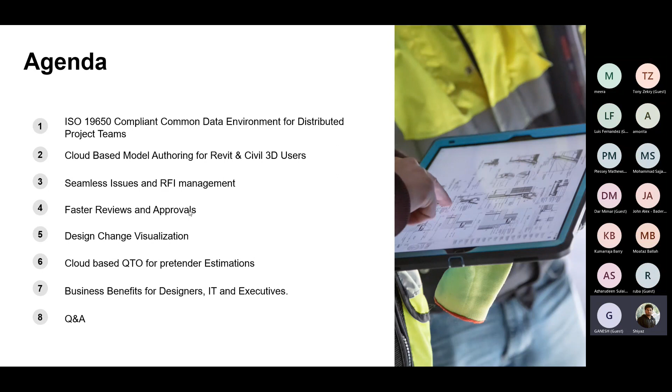I request, yeah, that's fine. Yeah. So let me start with the first session, ISO 19650 and the common data environment. So before starting, I would like to know, what's the ISO 19650? So basically, many of you are working with this specific code based on your requirement many of the time. Your consultant will be working with this. Your client will be working with this specific code. So you have to work with this as well.

So basically, ISO 19650 is a new international BIM standards family that defines the collaborative process for managing information over the whole life cycle of a built asset using BIM. So the ISO 19650 series enables teams to minimize wasteful activities and increase predictability around cost and time. So this standard can help all the AEC project teams to build a cohesive way to share, publish and review design and construction documentation to ensure that all the parties have access to the right information at the right time.

So another important aspect I would like to cover related to today's context is that the ISO 19650 standard provides guidance for storing and managing project data.

So this includes the use of information containers and a common data environment to support the 19650 processes. So what's a common data environment? This is one good definition for a common data environment. A common data environment is the single source of information used to collect, manage, and disseminate the documentation, the graphical model, and the non-graphical data for the whole project team.

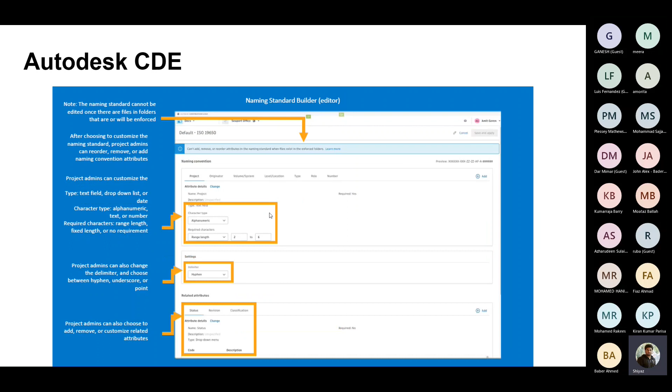So you have the freedom to set up ISO 19650 compliant naming conventions or metadata and the workflows inside the Autodesk CDE. So there are provisions available here. And apart from that, you can enforce your common data environment folders with this specific rule. So if any incoming file violates the preferred naming convention, it will not fall into the right folder structure. Instead, it will fall into a temporary holding area until it's compliant with the naming standard. And once it is compliant, then it can be moved to the right destination.

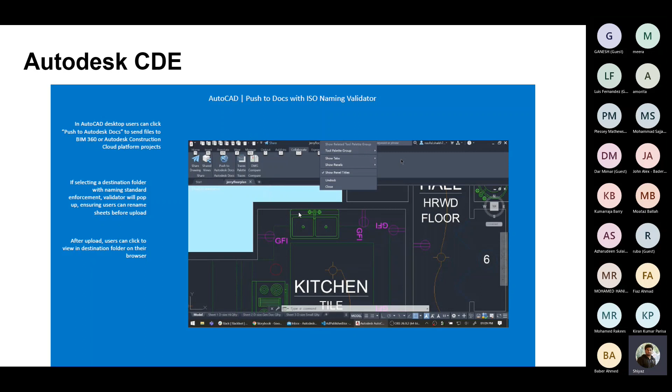For documents published directly from AutoCAD, there are provisions available. So if it is not compliant with the naming conventions, it will not be taken. Or if you are saving or publishing your documents using any of the other model authoring applications like Revit or Civil 3D using Desktop Connector, you can make sure that is also adhering to the naming conventions as per the BIM code that you're using. If not, it will prevent the data movement and give you short notifications on that.

So let's look into this fictitious design project done with the Autodesk Docs common data environment. Here is a distributed project team. Let's assume this project team is distributed over the Middle East region, say Kuwait, Qatar, Saudi, and UAE. So here the project team can create the folder structure which the ISO is specifying. So they are able to create different folder structures based on their own different project teams, just within the environment. And once the folder structures are created, the project team can upload their project files.

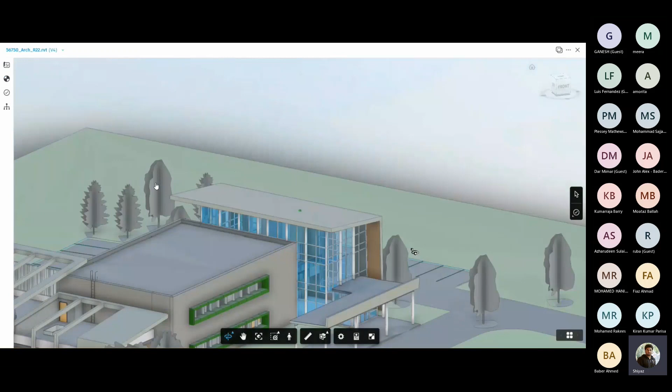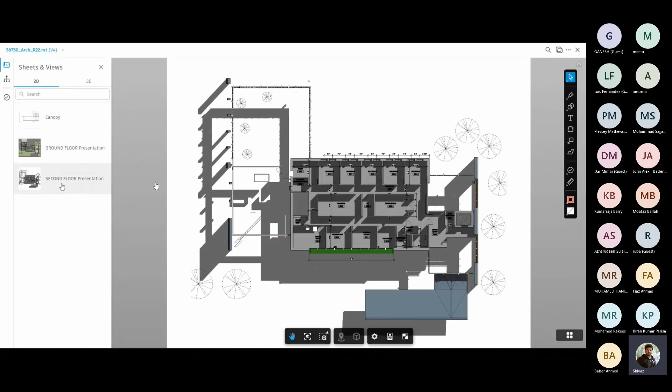So here the common data environment allows you to readily view the BIM models inside the environment without the use of any external applications. So the advantage here is that using a web browser, at any time, anywhere, you are able to access the project data. You can inspect the BIM properties of the design elements that you work with. And also there are options to view both 2D and 3D data inside the model itself. So this is a Revit model, so it contains both 2D and 3D data. So the 2D views, let's say the sheet views or the plan views, the project team can access anytime.

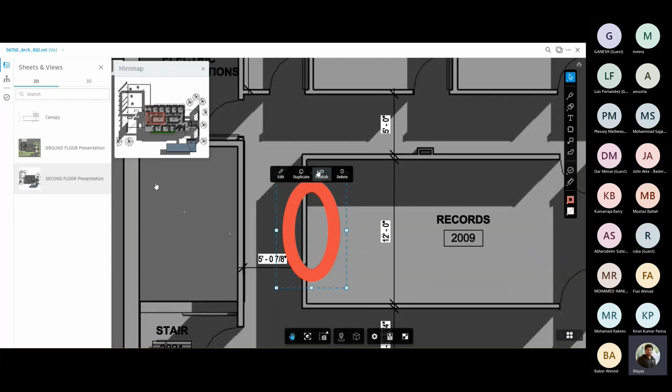And in case, let's say, the project lead identifies some kind of issue and needs to address it to the project team, there are two ways. The first way is to create markups, and the markups can be published so that the other project team members having access to the file can view the markups done by their team lead. So they are able to make the necessary design changes based on the instructions they got in this environment.

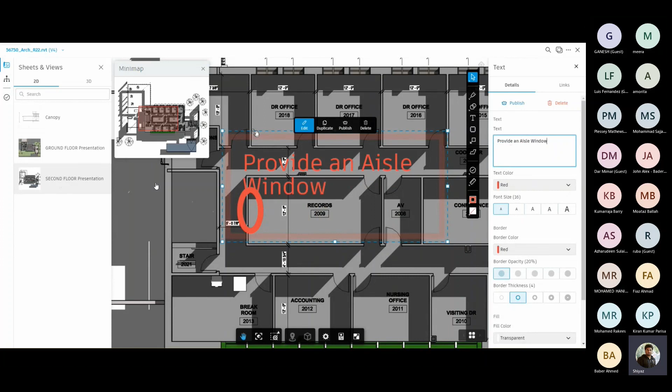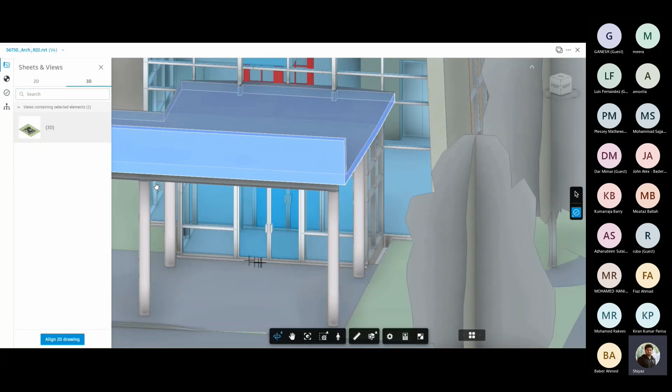So one another aspect is, if the project team need to be alerted if there is any design flaws, then there is one another option available called the issue creation. So that is more dynamic. For an example, just viewing this particular file, the project team identifies there is a wrong type of doors used in this project, so it should need to be changed with specific to the actual project information.

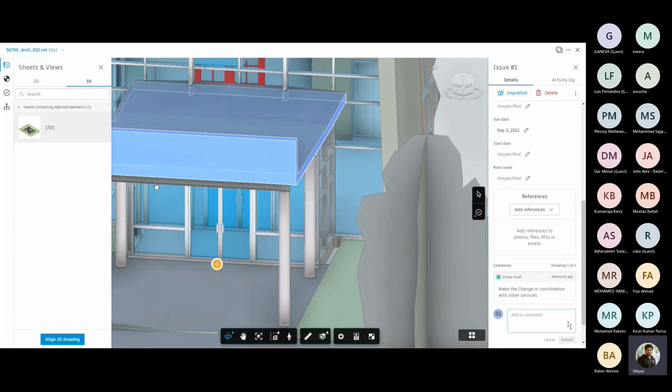So what they can do is they can create an issue so that the issue can be created and assigned to any of the project teams, so that the required project team can make necessary changes to the project data. So here the issue metadata contains the due date, the type of issue, and any other references, like RFI documents, that need to be attached can also be attached over here. And also verbal comments can be added over here. So all the issue related aspects can be checked over here.

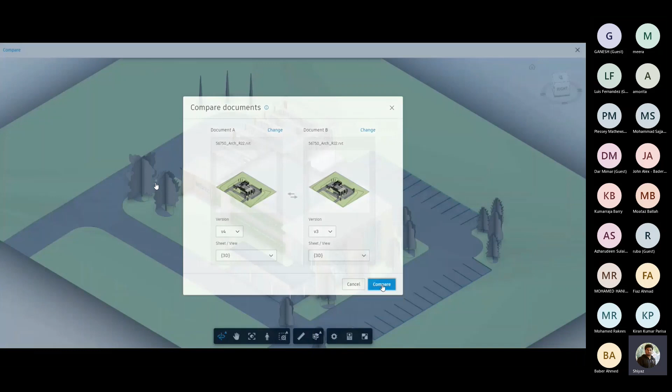So one another aspect is the auto archiving of the document. Any version of the document that is uploaded, we can have a track on that. So all the versions will be stored over here. So we can compare the difference between two different versions. Let's say in this case, the project team is about to check the difference between version number 3 and version number 4 of the document. So any additions or omissions or property changes can be identified over here. And this property change can be visually checked against two different revisions as well.

So project documents can be uploaded to the environment, and they can be sorted based on any specific attributes. So let's say the documents which are added over here, I would like to categorize some of the documents to be in a category. Let's say it belongs to the 30% of the construction stage. So I would like to create different sets like CD 10% or CD 30% in order to identify which stage the project documents belong to. And I can segregate the particular documents into the right set. So let's say here I just move this one to the set belonging to the construction documentation stage 30%.

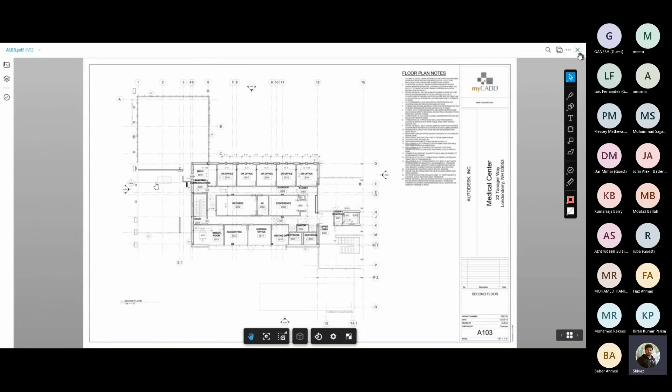And the documents can be readily viewable inside the environment, and anytime the project team members can check the different versions, and they can make a visual comparison of what changes happened between different periods of the project.

So another aspect is the robust permission levels. With this, you can restrict your user access to certain folders or limit access according to your user role or company. You can control sharing and design deliverable exchange with the assurance that the right information is in the hands of the right project people. So the project admins can invite project people just by adding the members to this particular environment. So this is as easy as possible. It can preserve the data of project people inside its registry, so that in future projects also these people can be added in one shot.

You can create different project specific roles, and they can be assigned with any specific modules based on the project usage. And the next important part is they can be assigned with the folder permissions, which are already created. So any folders which are created can be assigned with the people. So these people can be added with any specific permission levels, like view or create or modify. Any specific permission levels can be assigned over here.

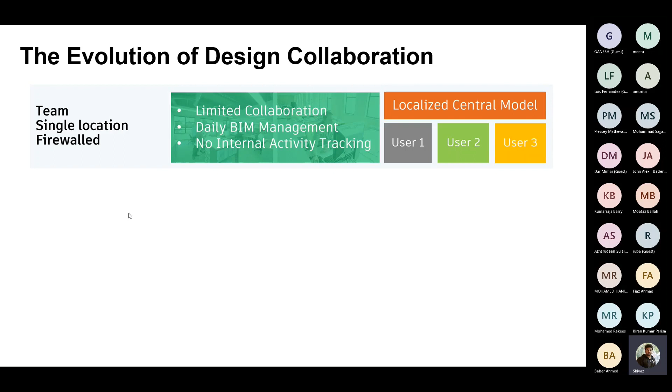Here is shown the evolution of design collaboration. Around 10 years ago, it was basically a single team, single location, firewall network using LAN or similar networking options, with limited collaboration and daily management required. From there, it became much more sophisticated, like enterprise with multiple locations and firewalls, requiring complex hardware like hyper servers or proxies to connect different offices.

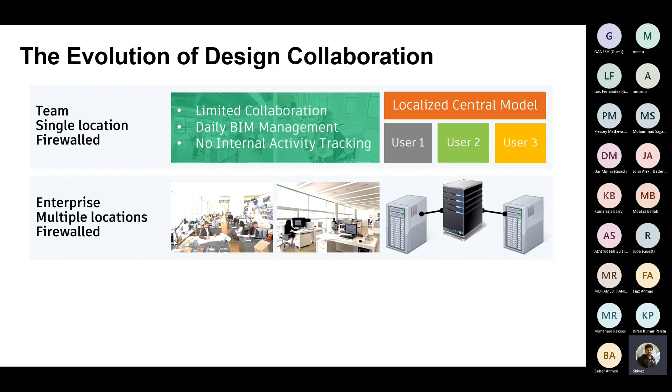Now it is the era of the cloud—multiple projects, multiple companies, multiple access. People from any part of the world can access the project using the cloud. That is what ABC Pro, or Autodesk BIM Collaborate Pro, is offering.

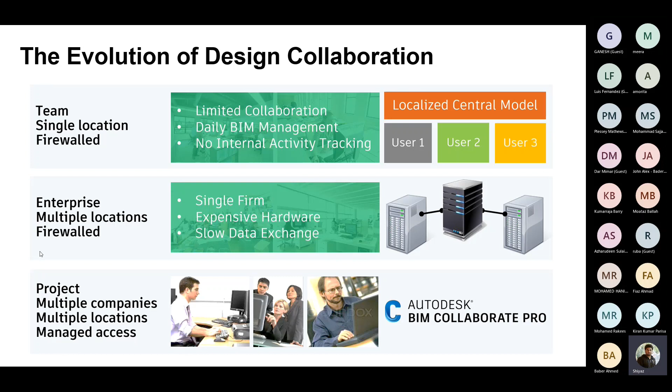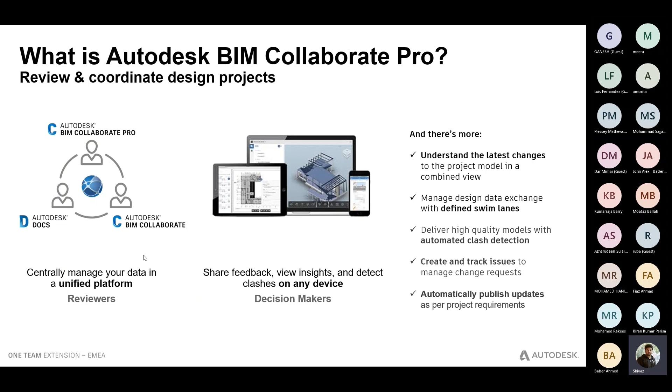What is ABC Pro? Autodesk BIM Collaborate Pro has features for cloud-based document management and concurrent authoring from Revit designers, Civil 3D designers, and Plant 3D designers, along with many more aspects that I'll show in upcoming slides.

BIM Collaborate Pro is a unique platform containing four different modules. The first is Autodesk Docs, an ISO 19650 compliant CDE system that manages all people, projects, processes, and data. The second is cloud work sharing, which enables Revit, Civil 3D, and Plant 3D users to work concurrently through the cloud.

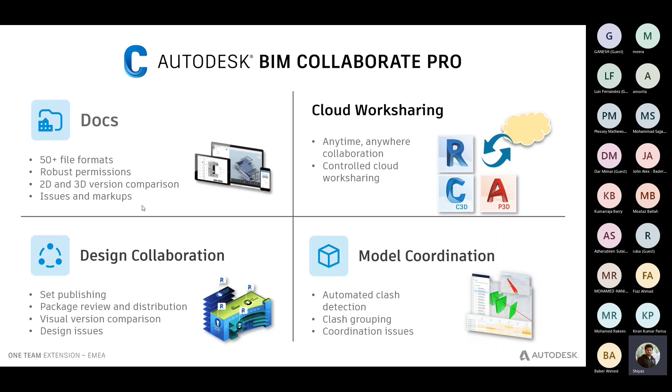The design collaboration part enables design teams to share design packages with other teams in a connected environment, so they can analyze document contents, share different versions, and create packages to share with other teams. Finally, there is a model coordination module, which enables identifying coordination issues while design is progressing, so the design team can correct their models on the go—an entirely automated process.

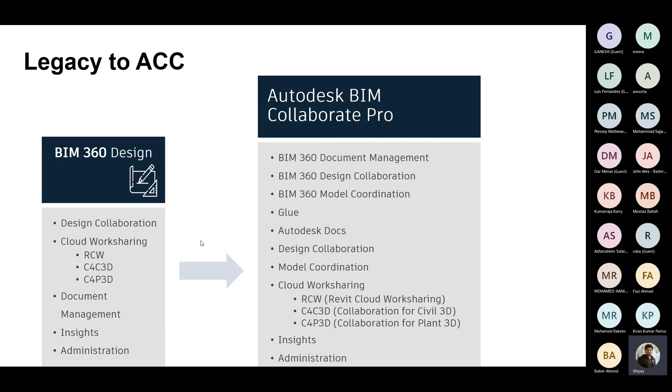Before, Autodesk has this legacy platform called BIM 360 Design, and now it has been rebranded as the ABC Pro with much more robust features. One advantage is with ABC Pro subscription, users can access both BIM 360 and the new Autodesk Construction Cloud projects as well. Now we can check how this platform supports the Revit designers.

Let's assume this is a fictitious project where an architectural design team has to use cloud in order to use for work sharing. What they can do is use the cloud platform or the CDE platform as the repository for storing the project information.

From the right project, from the right folder, the work in progress project team can upload their design files, and anytime they can simply use the synchronization features inside Revit to synchronize or update the latest information to the cloud.

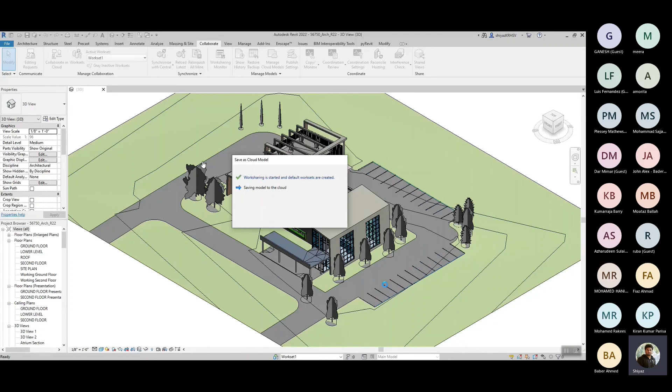The advantage of this particular thing is even if the team is distributed in any countries or any geographical location of the world, they can still access the project and work concurrently.

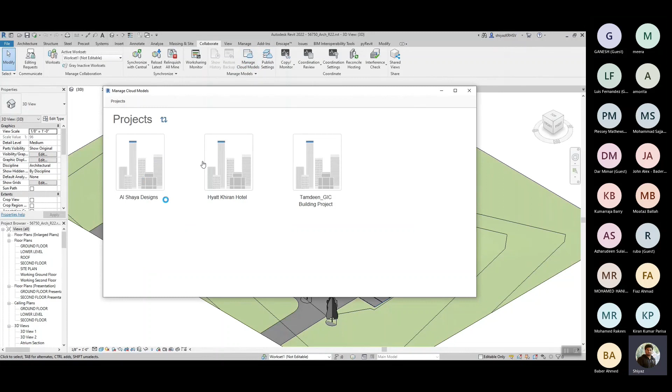So once they can use the features of Autodesk Docs in order to publish the latest contents. If there are some design changes and the project team has to publish the latest sets created - let's say drawings or sheets or specific 3D models, 3D views - they can create the packages and publish the same with the cloud. This specific part is available within the Revit environment.

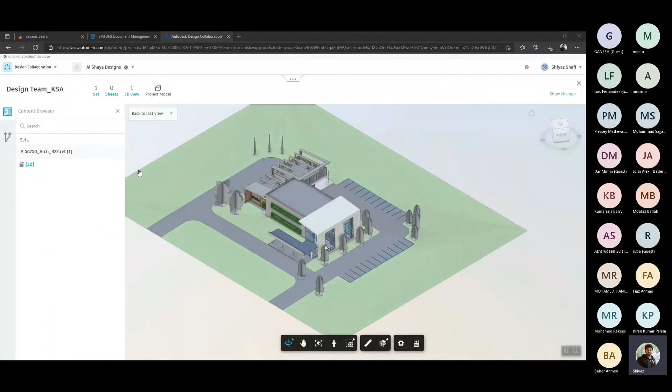So once the document has been published, the other project team which has access to the same folder location can view it using the cloud features. So here this particular part has been published, and we can check how it will be visible from the other end. Let's say this architectural team lead is just viewing the document which is published by the work in progress project team.

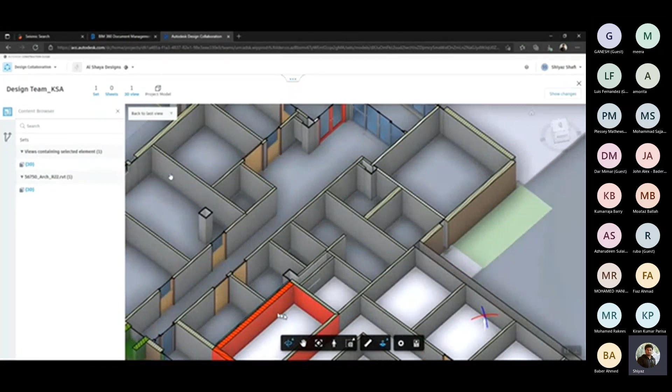They can inspect the contents of the document - let's say the BIM properties of the walls, or even create sectioning tools in order to inspect the contents of the BIM models using the cloud platform itself. So here they are not using any kind of model authoring applications in order to view these specific things. Instead they are entirely using the BIM viewer which is available within the cloud environment.

And this is what we are calling swim lane. Inside the swim lane, if the project design team head finds the information suitable for sharing with the other design parties - let's say interior designers, or the MEP team, or the structural team - they can simply create a package, and this package can be shared with the other team with some specific notes.

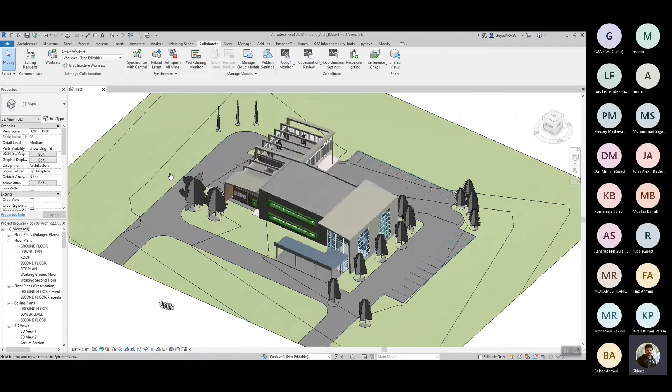In order to show what are the contents of the latest packages. So once it is shared, and let's say the project team is making some design changes to the model - let's say in the lower level part, the project team is changing one of the wall types into a different type. Some changes in the geometry as well as materials have been made, and a new door has been placed in another specific area of the project, and this is a new addition.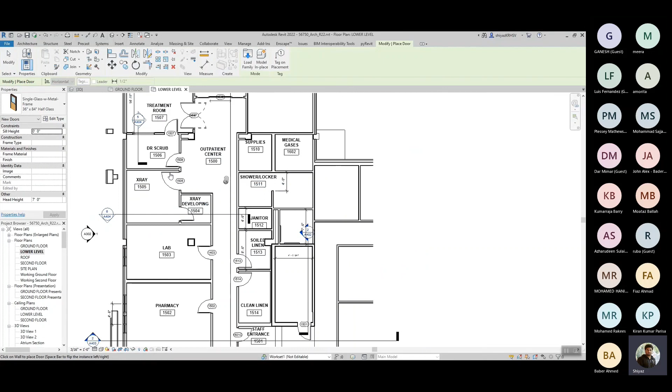Apart from that, if some omissions need to be done - let's say one of the doors has to be removed - so this is an omission. So this much changes has been made by the design team, and they can simply synchronize with the central in order to update the latest changes.

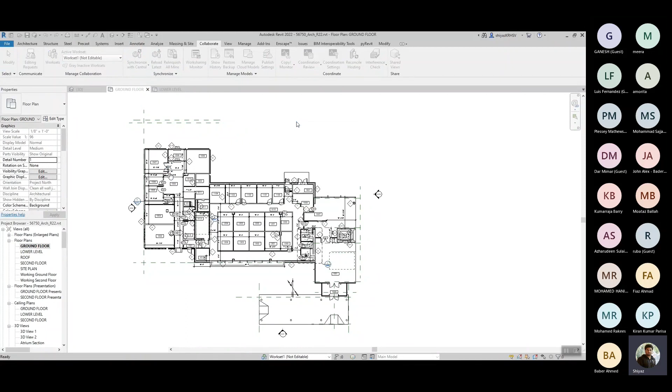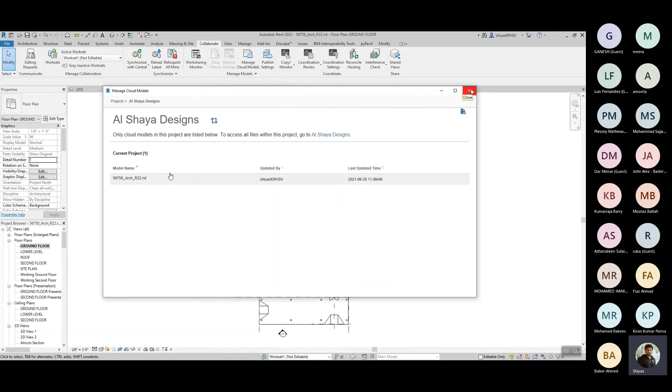And if this needs to be published in order to notify the other project members, they can simply use the publish options available inside Revit to publish the latest sets of data. What they can do is select the right project, and from there publish the latest sets. On the other hand, the project team lead of the same team can inspect the contents there using the same cloud feature.

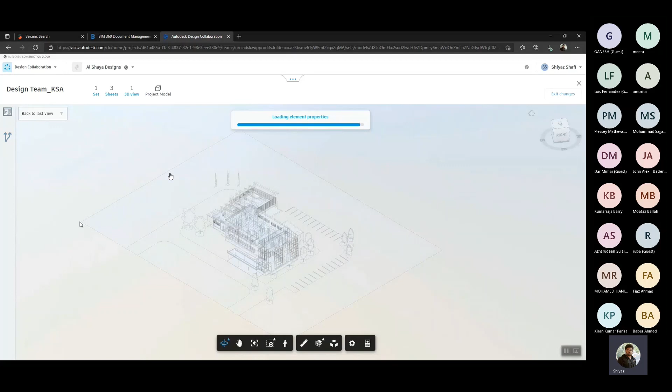So in the project status, it shows that a new file has been published. They can view it using the visualization options available over here called change visualization. This particular part enables them to visually identify what are the changes between the latest two packages which are received.

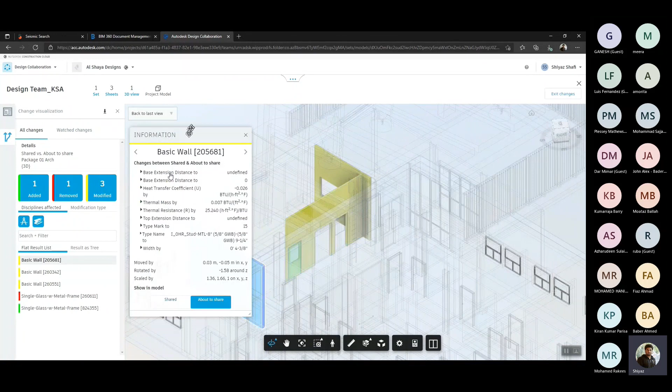So additions - if a new element has been added, the BIM properties can be viewed. Omissions - if some elements have been removed, it will show that thing as well. And property changes - so they can inspect the two different versions. For example, this particular door or wall has a different width in two different stages of the project, so they can view from there.

And the next thing is if it is found suitable for sharing with the other design teams, they can create a new package again based on the project phase, and it can be shared.

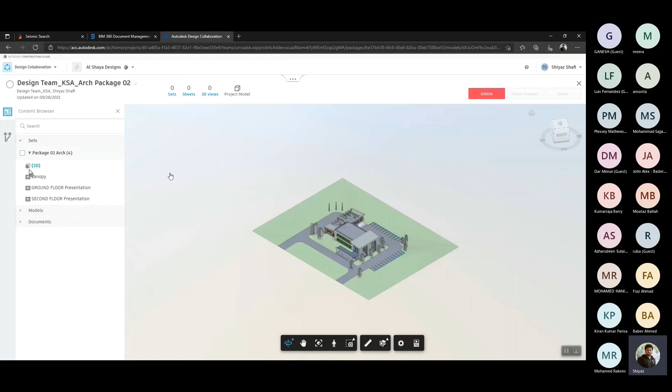So what will happen is it will automatically create a shared space within the common data environment. From that shared space, this particular document will fall. So the shared space is the place where every other project stakeholder can have access, or the other design team can have access. So from there, the other project team can take the files.

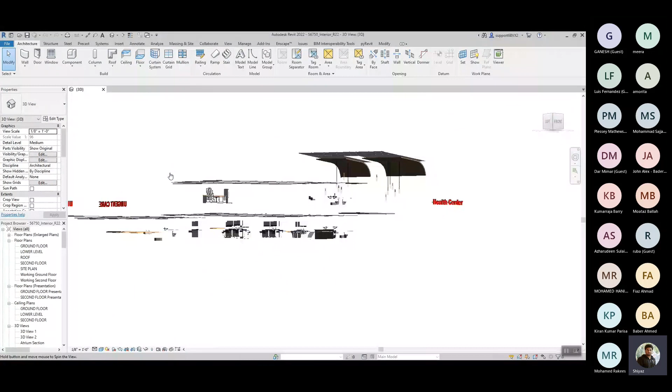So here, this is the interior design team. This particular team has to rely on the main architectural model in order to make design changes accordingly. So they have to collaborate with the cloud, so they can utilize the CDE space. So what they can do is they can just save the file and synchronize it using the cloud.

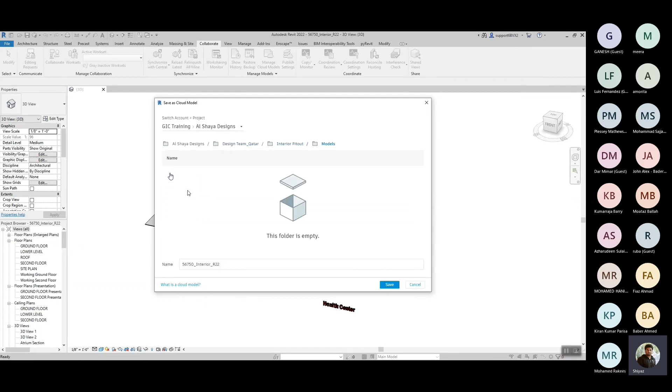So in the CDE space, they can select the folder which they have access to. They can simply go to the project which they have access to, and from there they can access that specific folder which they have access to. So here in the interior fitout models part, they can save their BIM models.

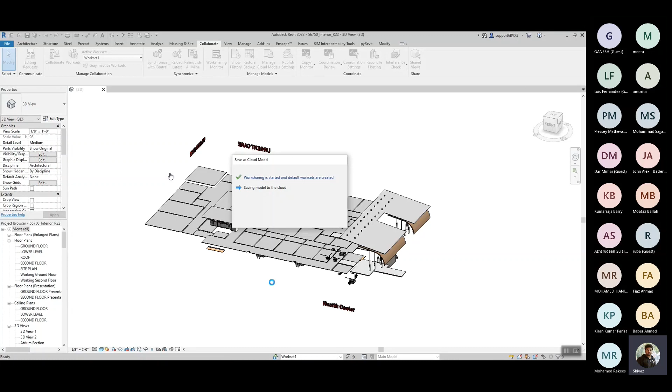Once the model has been saved, and if they have made some design changes, they can upload the latest information. And in case they need to extract or link other BIM models, let's say in this case the architectural model has to be linked in order to work with, they can link the architectural files itself, using the Link Revit feature.

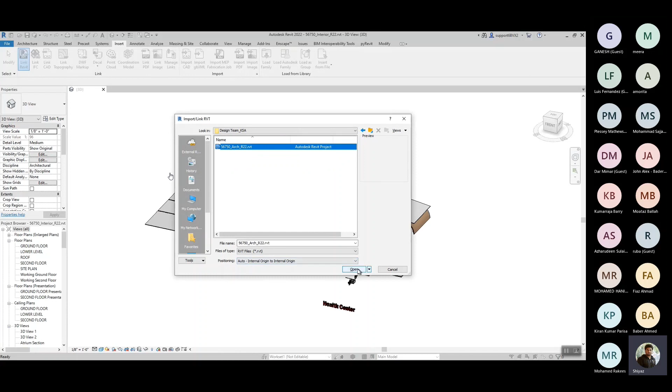In order to link the other models, they can utilize the Autodesk Desktop Connector, which is like a local synchronizer for the cloud-based CDE. This will show, just like in Windows Explorer, the files or folders which the project team can have access with. From there, from the shared space, they can select the right project files in order to link or extract the same thing.

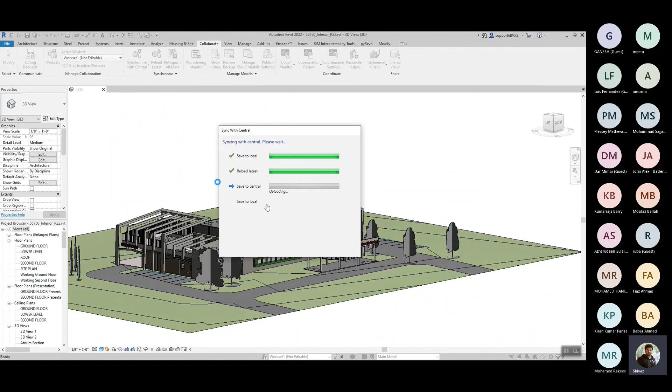So this is how the design team can work concurrently, and if they need to view or publish some specific design changes to their cloud-based platform, they can perform that. So by this way, the architectural team, the structural team, and the different subdisciplines of the MEP team can all work together in the same environment using the cloud-based features.

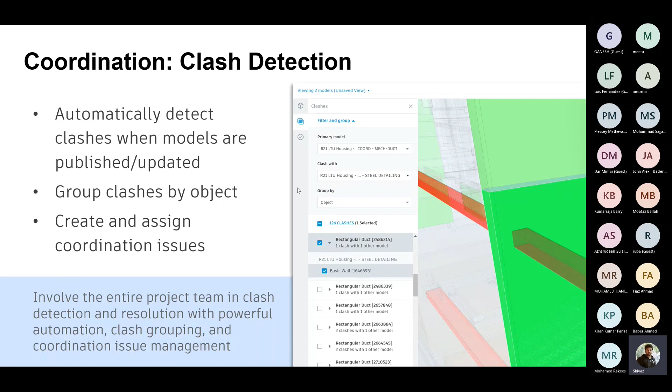So when the entire project team is involved in clash detection and resolution, issues can be identified and solved without waiting for coordination meetings, using the clash detective features available inside the ACC Pro. Like I said, there is a coordination model coordination option available, so the project team can utilize the features of model coordination.

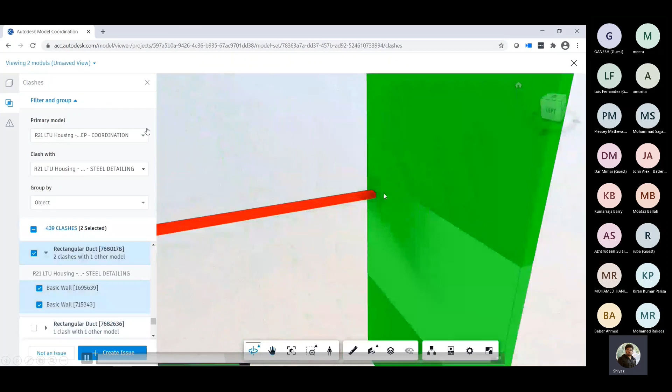Let's say I can just move to some specific part of the project. So here in the model coordination, it will show the automated clash detective features based on the different project files that have been added into the coordination space. The project team can be notified by creating issues so that the work-in-progress project team can make design changes based on the issues identified within the model coordination space.

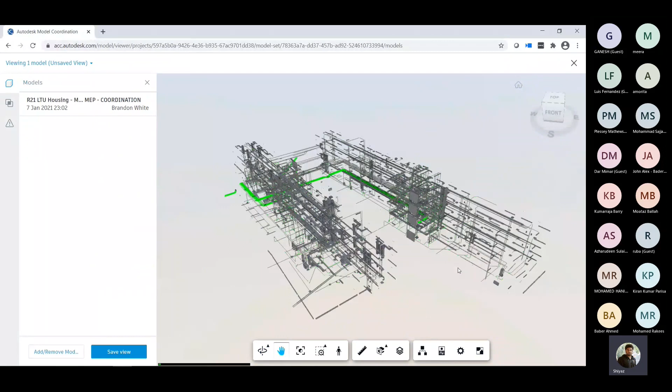So if we are making the same shared space as the coordination space on the go, if any issues have been identified, that can be rectified while the project is progressing, before moving to any particular LOD phases.

And now we can check how this platform can support the Civil 3D designers. Basically, Civil 3D designers can utilize the cloud platform for storing their design files, whether it can be survey files, road alignments, utilities, or whatever disciplines and subdisciplines in the civil infrastructure. They can utilize the cloud features, and the project team leads, like the project managers or other reviewers, can utilize the document management space in order to view the files and to create markups and issues to communicate with their project team.

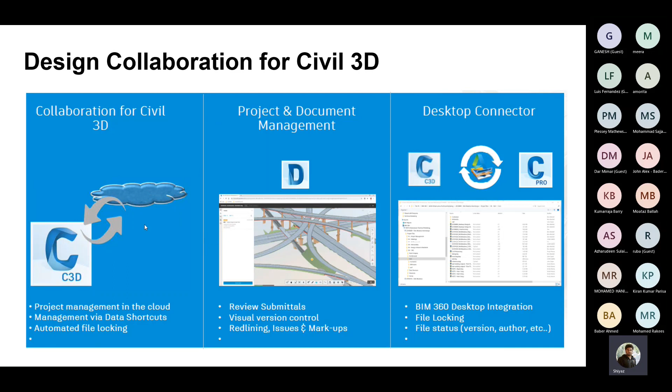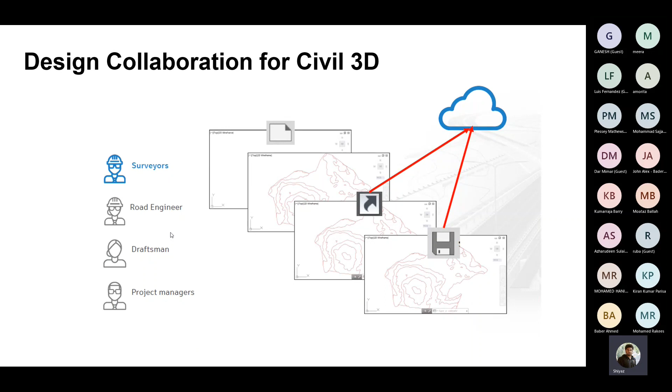And they can utilize the desktop connector in order to extract or link their specific project files. So let's say the surveyor, these are the parties who are creating the terrain data first. Let's say they have a Land XML file and they just need to upload the same to the cloud-based environment. So the other parties, let's say the road engineer, can utilize the data shortcuts features available inside Civil 3D in order to fetch the contents of the terrain data so that they can create their road alignment and all.

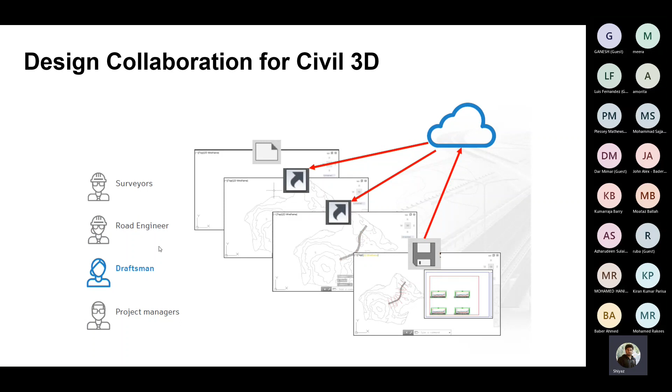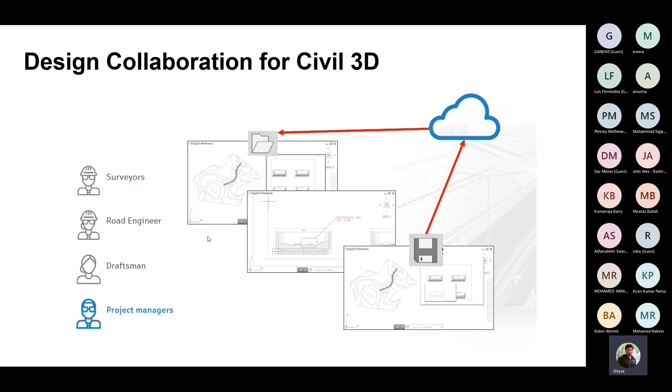So the draftsmen can use the same data shortcut features available within Civil 3D, extract the contents of the road design file for the alignment, and start creating the production drawings. And the project managers can view the files directly from the common data environment, view the latest contents, and in case some corrections or markups need to be put, they can make them, and if they need to communicate some issues with their project team, they can create the issues as well.

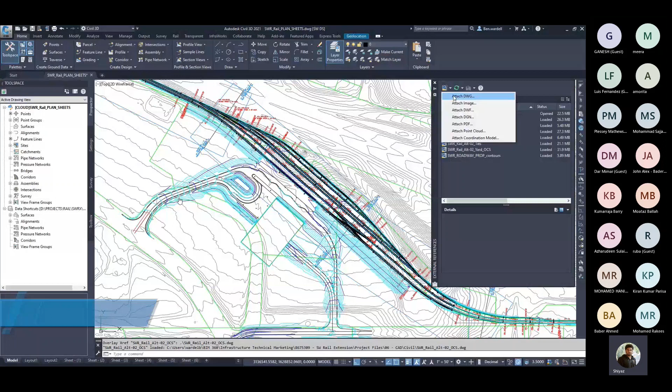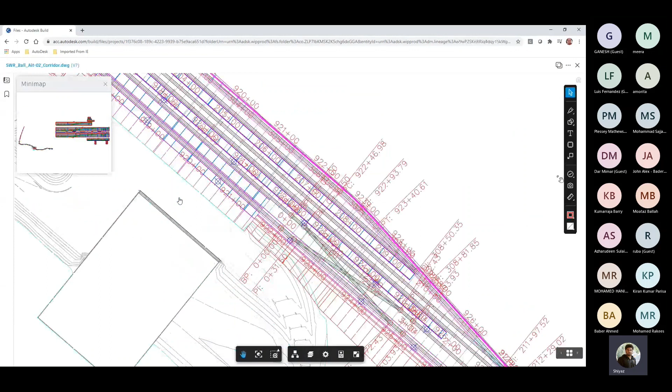So at a glance, we can check how this is happening inside Civil 3D. They can upload the files into the CDE space using the upload features available, extract the design files, and utilize the data shortcuts to fetch the contents of the files. This also enables users to lock the files so other team members cannot access them. They can also create markups, compare different versions, or create issues. All these features are available within this environment for productive collaboration between the project team, and it will save drastic time.

And the design coordination issues can also be identified and rectified using this platform for civil infrastructure users. There are some supporting features the platform can provide. The first one is the Revit issue add-in. This is an application which is available free to download. With the Revit issue add-in, any issues identified within the common data environment are readily accessible within Revit itself, so users can directly view what issues have been assigned to them and make necessary design changes. Before this, they had to rely on open standard file formats like BIM Collaboration Format, BCF kind of platforms.

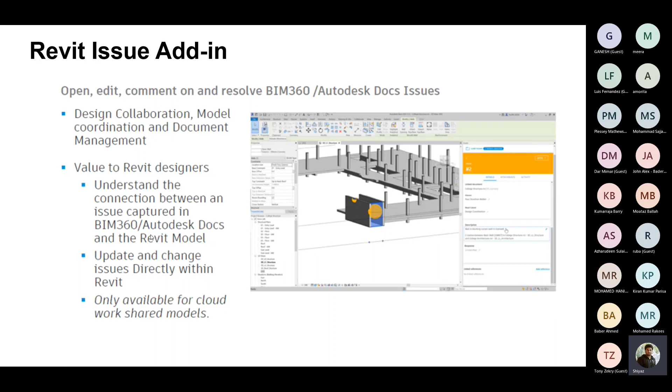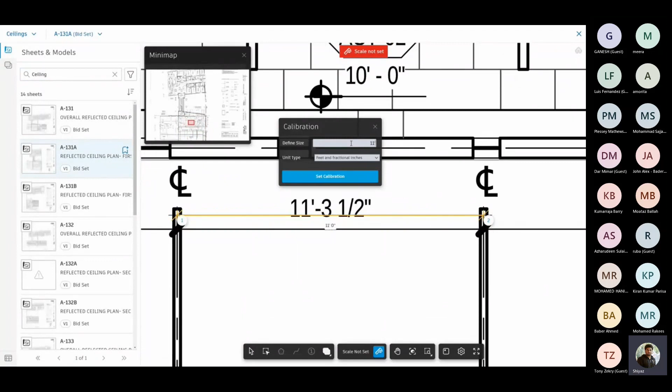For quantifications, you can upload the right project documents, and if they are 2D documents, let's say a PDF or AutoCAD drawings, then for the first case, the PDF can be calibrated by measuring two specific project areas, so that once it is calibrated, accurate quantities can be taken out.

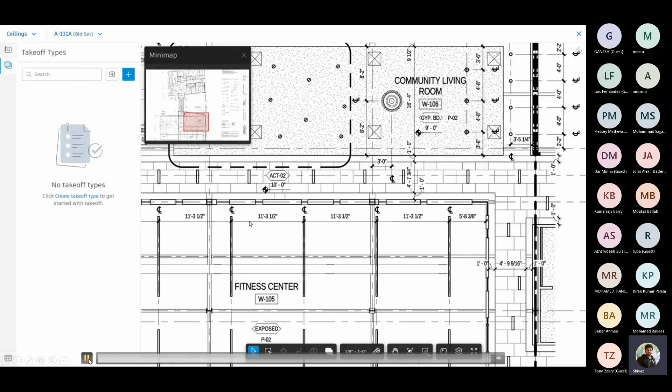So there are different sets of quantifications available. Area-based calculations for calculating the floor areas or wall areas. Line-based for taking the distance, taking the quantifications for the railing types or wall lengths kind of thing. And there is also number-based calculations in order to take the counts of elements, and there is a volumetric calculation in order to take the quantifications of 3D elements on a volumetric basis.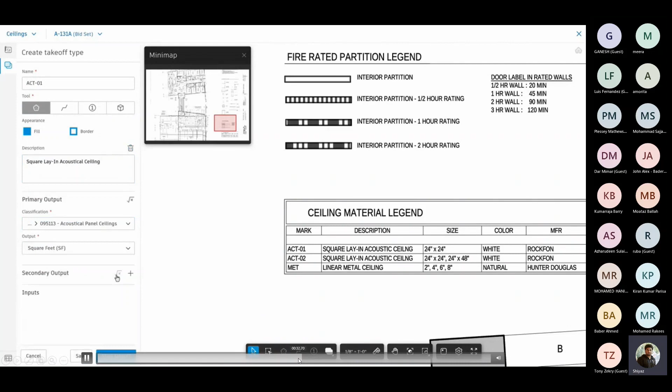So based on the drawings or based on the models, you can specify the project area, and from there you can take the quantifications of the elements based on the classification systems you have added. And one advantage here is from the 3D model based calculations. Let's say this is a Revit model. So Revit basically features all elements with a specific property called its category. So elements can be created as a cluster.

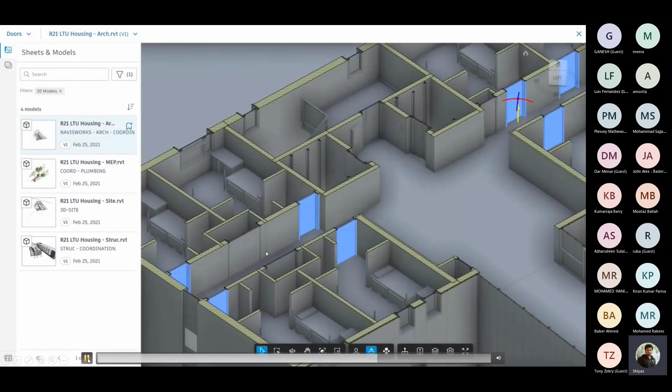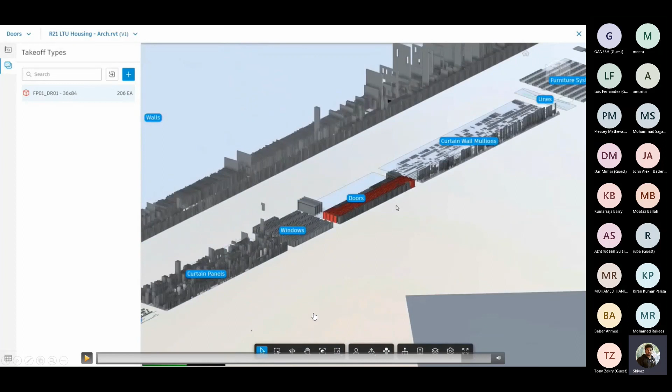So in one go, the elements can be separated based on their category, and from there we can identify where any kind of quantifications are yet to be taken, or for how many elements we have already taken the quantifications. So these kind of checks can also be done over here. So this is entirely based on this cloud-based platform for Takeoff.

So benefits are like manage sheets and models within Autodesk Docs. There is no specific requirement for any other common data environment. You can still use the existing, and we can take the takeoff of linear elements, the count or area based. We can take 3D takeoffs from the BIM models itself, and there are no limits for the projects or file storage. Any number of files can be uploaded, and we can take care of them.

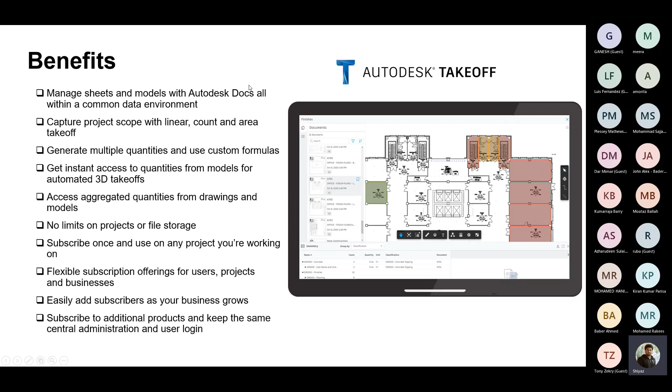And subscriptions are very much flexible. You can easily add subscriptions based on the number of the project teams as it is progressing. And at last, we can just go through the business benefits for designers, IT, and executives. For the designers, they can have access to the project at any time, anywhere, at any location of the project, and they can have access to the files.

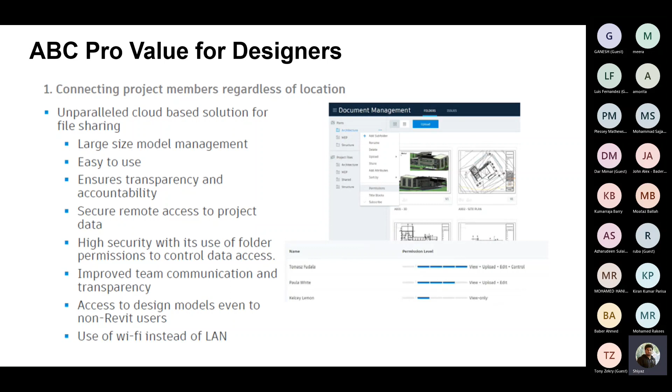So the transparency and accountability is enhanced, and the security permissions kind of things can be easily enabled, and it is also compliant with the BIM standards and BIM codes that they are using. Another aspect is this is easy to use. So any project member can start working on the very first day of their work.

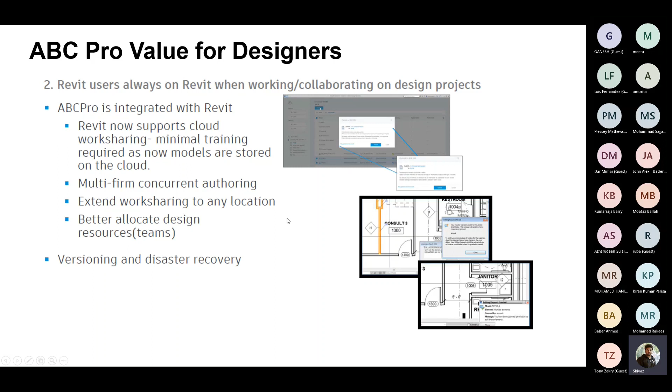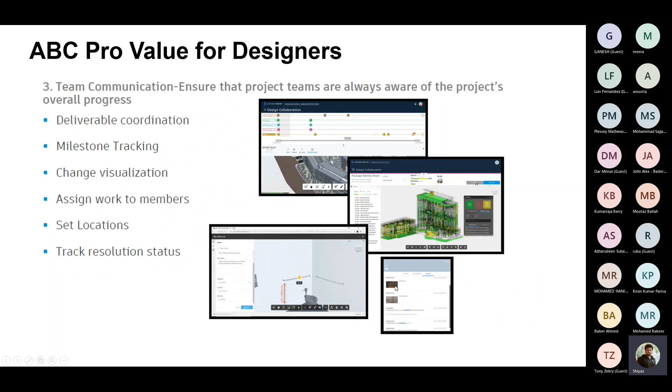And versioning and disaster recovery is another option this particular platform is offering. So since it is auto archived like a time machine, you can go to the data at any specific time of the project. You can recover. And this is suitable for all the cross-discipline project teams, architects, engineers, civil engineers, or GIS, people working on the infrastructure side or people working on the plant side. They can easily use the project at one time.

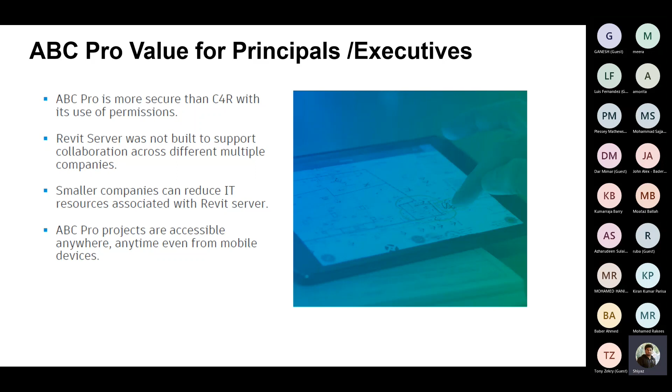And for the IT team, the one specific part is the security concern. So it can address all the security related things. You can just visit the Autodesk Trust Center so that you can see what certifications Autodesk has for their cloud-based products.

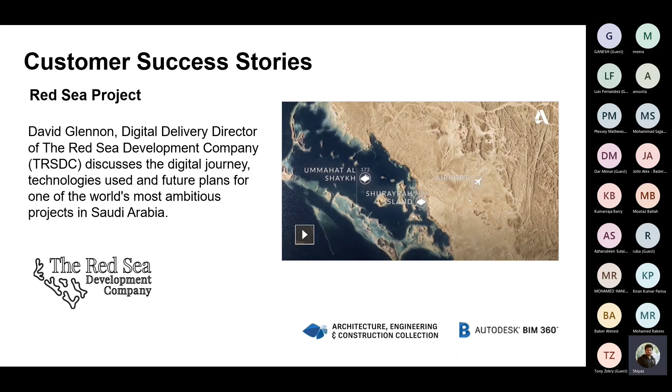And here, I would like to show a few customer success stories. Some companies in the Middle East area have effectively utilized the cloud-based design collaboration workflows extensively in some of the projects in the Middle East area. The first one is the Red Sea project, which is done by the Red Sea Development Company.

The second is KEO for their different projects in the Qatar, Kuwait, UAE and Saudi regions. They have effectively utilized the legacy platforms as well as the new construction cloud platform for their projects. SSH is another consultant having projects in most of the Middle East area that is effectively utilizing these platforms.